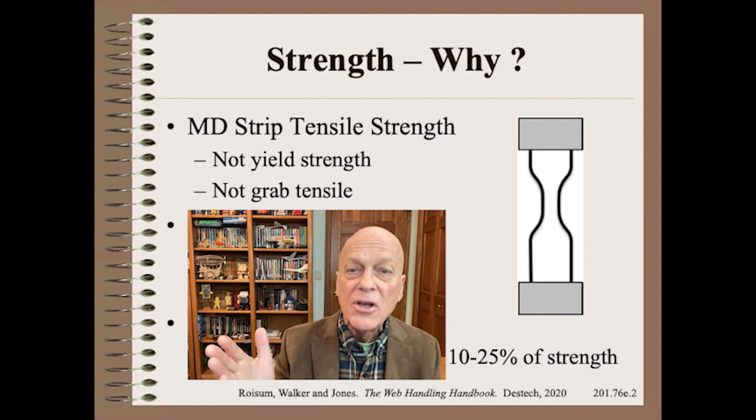However, second only to these physical properties might be the most valued material property of all, namely strength. Specifically, ultimate strength, not yield or one of the many other strengths. That is almost certainly because it is easily defined and measured. Specifically, we mean MD strip tensile instead of CD. Finally, web handlers and almost all other groups use strip rather than grab tensiles.

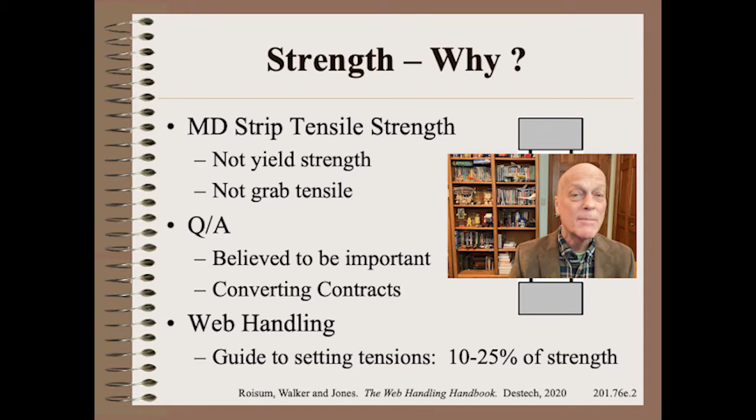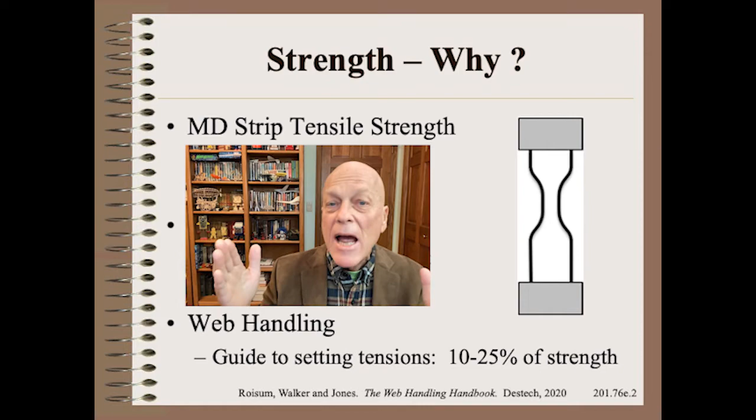The legacy of strength being the queen of properties goes back more than a century. The legality of strength is that it is often specified in converting contracts. Web handlers also treasure strength because it informs us of typical starting point guidelines for web tensioning, typically 10 to 25% of the web's MD strip tensile strength.

We all have to choose units that make sense for our applications, and these units should be labeled every single time a number is presented, spoken or written. But here, I mean more than whether to express them in metric or US units. Rather, whether to use lineal tension, which is most common on machines, or full engineering stress, where we non-dimensionalize by both web width and web thickness.

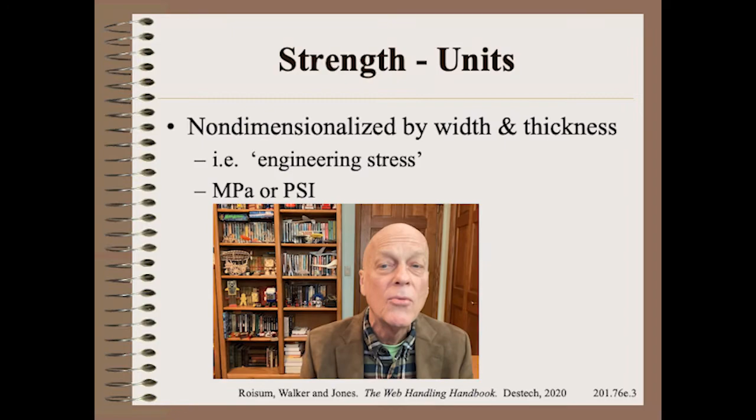I choose engineering stress in megapascals or PSI because it avoids the wide variability of widths and thicknesses seen in the web world, which we already covered in Web 201.76b.

If we non-dimensionalize by both width and thickness, we reduce the range from many orders of magnitude down to around 3. Here we see that steel is perhaps 1,000 times stronger than the weakest web, that would include wet or perforated toilet tissue. Anything weaker cannot be tensioned and must be carried on forming belts. Most materials, including all paper and paperboards and most films, fall in the 10 to 100 megapascal strength range.

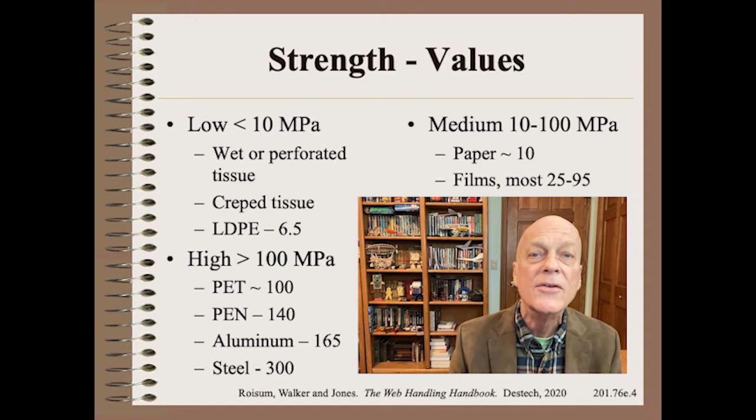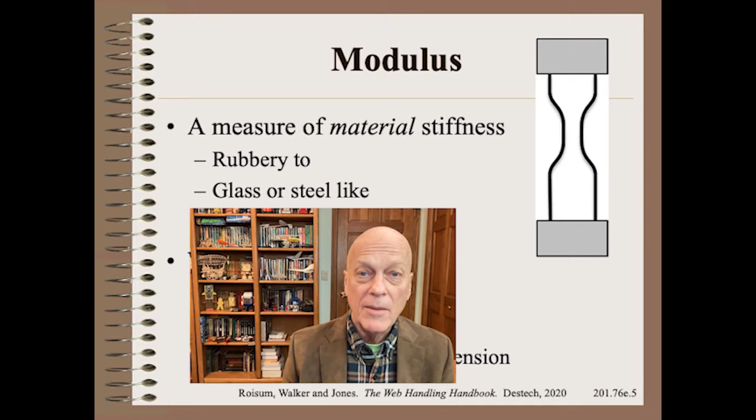Modulus is a measure of material stiffness. It can vary from stretchy, like a rubber band, to stiff, like steel. While modulus can be measured on similar equipment to tensile strength, it requires special software. Web handlers use modulus for at least 3 purposes. Researchers require it for modeling. Also, thick, stiff materials have minimum core and roller bend radii before web damage occurs.

However, by far the most common use in web handling is to tell us whether we should use speed control or tension control or either. Rubbery materials are most easily handled under speed control, often improperly called draw control. Stiff materials are most easily handled with a dancer or load cell tension control. Materials in between might be handled either way.

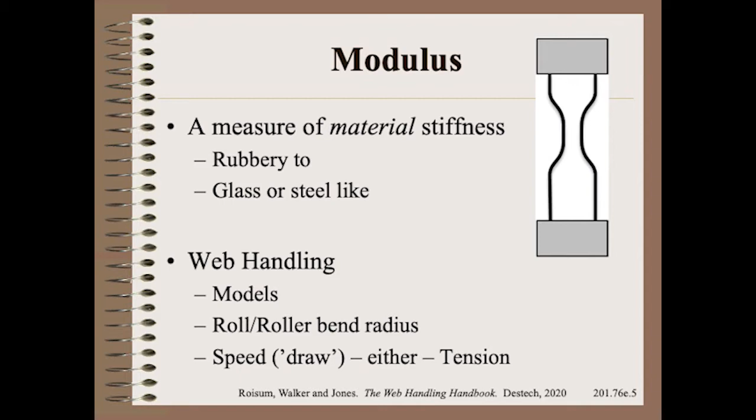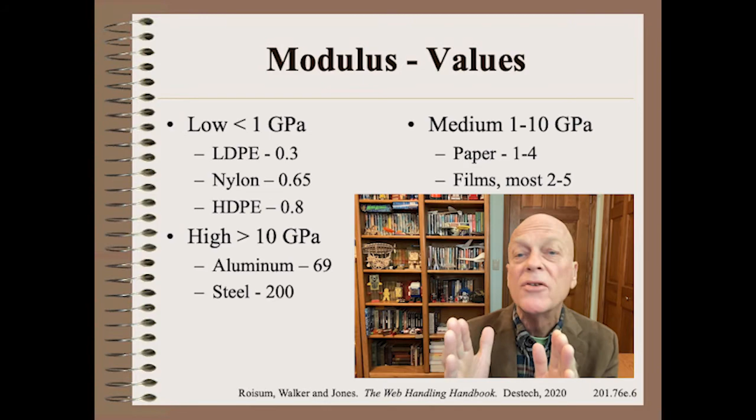Modulus only varies by about a factor of 100 for common materials. Nylon, rubber, and some nonwovens are at the low end and metals at the very high end. Paper and most films fall in a rather narrow range of 1 to 5 gigapascals.

There are many other strength-related properties that web handlers might find handy. Modulus of rupture, sometimes called TEA or total energy absorption, combines the ideas of strength and modulus together. It is simply the area under the stress-strain curve. It is very predictive of web breaks, aka runnability.

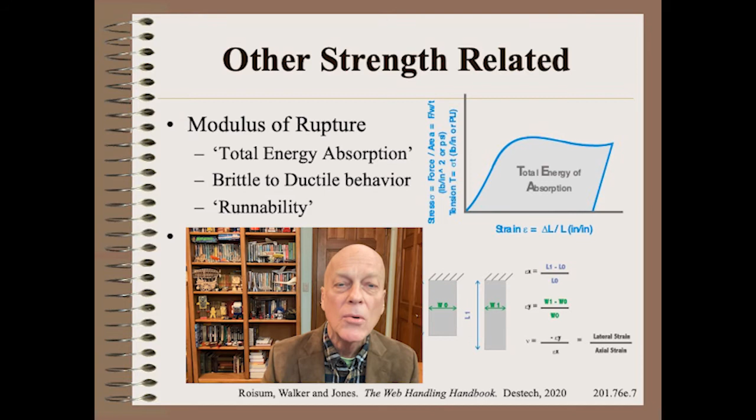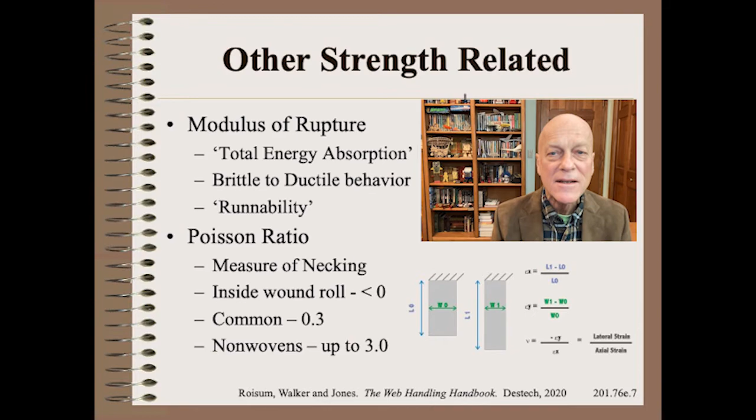Another interesting property is Poisson ratio. That is a measure of necking. Solids typically have Poisson ratios of about 0.3, but they must have Poisson ratios between 0 and 0.5, which is incompressible materials such as rubber. However, structures are not so constrained. They can be less than 0, where the web actually gets wider when you pull on it, to as much as 3, where the web necks more than it elongates.

I believe that friction is, by far, the most underappreciated material property in web handling. It is useful for many things, such as predicting web-to-roller traction for design purposes. The COF of most webs on metals is around 0.3, but on smooth rubber coverings can be more like 1.

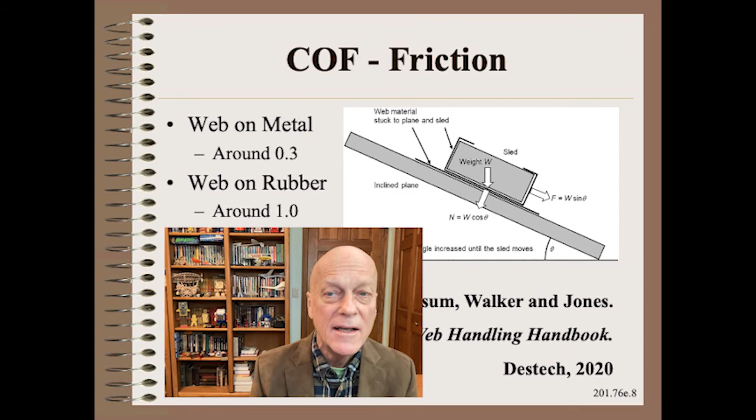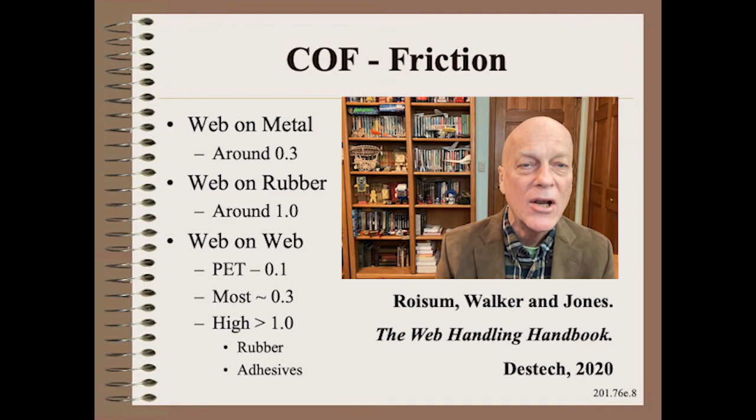No less important is web-to-web COF because it informs us of what to expect for certain winding defects. PET is super slippery, and thus type 1 telescoping is anticipated. On the other extreme, certain webs have interlayer COFs exceeding 1, in which case out of round and vibrating wound rolls can be anticipated.

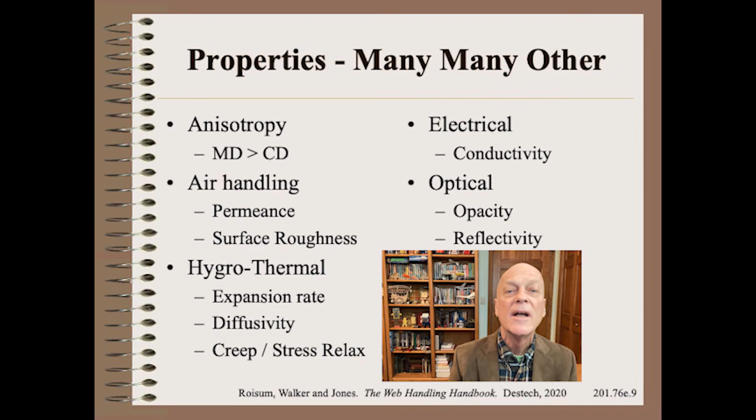We could go on and on with chapter-length descriptions of important web properties and how to test them and how to use them. However, there is simply no need. All you need to know for most of these purposes is to review Chapter 2 of the must-have 750-page Web Handling Handbook.

I hope that you have enjoyed this episode on material properties in this Destech miniseries. Stay tuned for next week's show, where we will discuss the wide range of wrinkle-like behaviors.